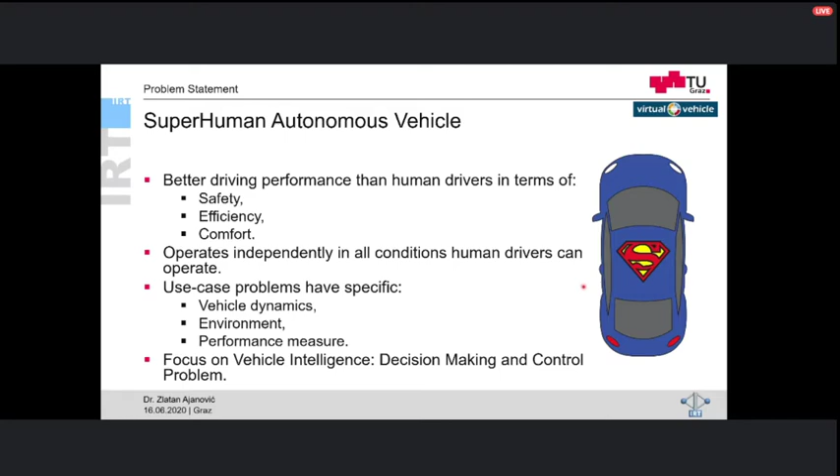So an autonomous vehicle actually can be considered as an intelligent agent. In general in the AI literature we have the term intelligent agent: there is an agent which interacts with the environment, and this can be described formally using a Markov decision process. What we have is an agent operating in some environment, and the agent is some kind of learner or decision maker, depending on which methods we use, learning or pure planning methods. And the environment is everything but the agent, which it interacts with.

So the agent interacts with this environment, and this environment provides the agent some kind of feedback, and the feedback is, as we will see, represented in terms of reward and state. And the state captures all relevant information from the history. So if we have information about the state, we can throw out all the history from before and just keep this state information. And the decision which the agent makes, for example, based on learning or planning, is called action.

So this is how the agent interacts with the environment, and the goal of the intelligent agent is to maximize the cumulative reward in the long run. So if we are in some state st now, we want, in the long run, to maximize the cumulative reward of all of these rewards which we will get in the future steps. This is not so easy a problem, and we will see different methods to achieve it.

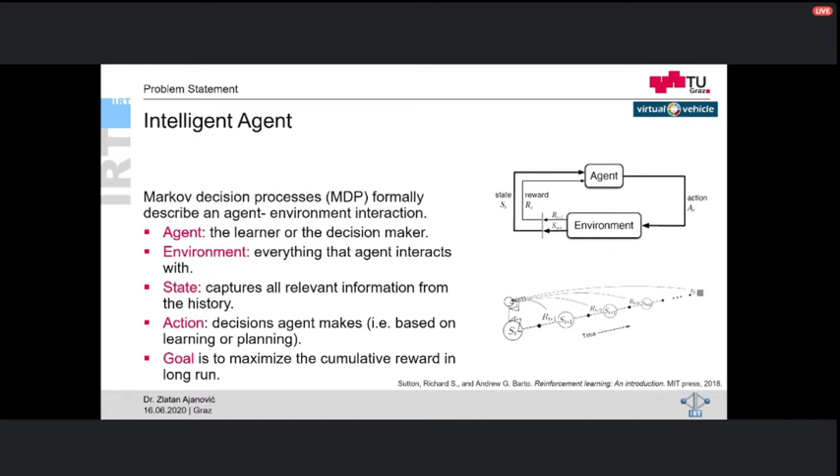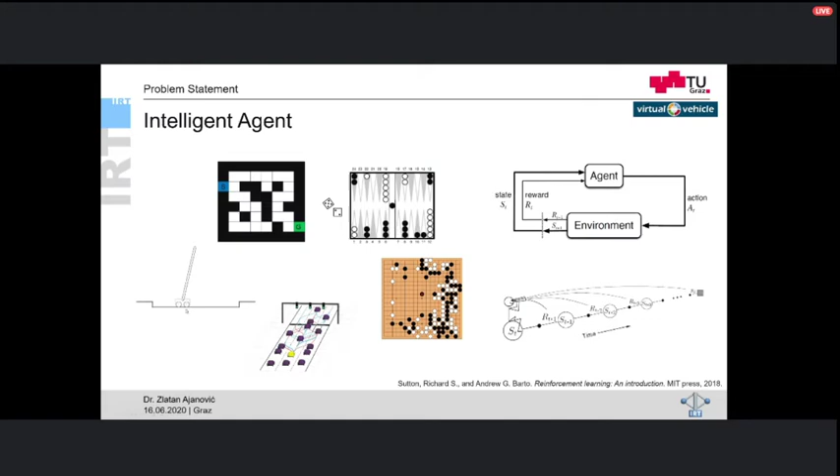There are also different possibilities to describe a system. If the system is, for example, not stochastic, or if it's fully deterministic, we can also formulate it as an optimal control problem. So there are many different examples of the intelligent agent. It can be finding a path in a maze, or playing a backgammon game, or playing Go, or balancing the pole on this moving base, and also automated driving.

So now we come to the planning and learning method. I want to provide you some basic information about planning and learning, just to get everyone familiar with this. There are not so many details, let's say, but I think it's enough to get the full intuition.

So actually, planning and learning are both solving the same problem. We have an intelligent agent, and we want to achieve some kind of intelligent behavior of the agent. In planning, there are two basic ideas. It's based on the value function as a key intermediate step toward improving the policy. So these are state space planning methods, and they need some kind of value function which represents this long-term cumulative reward. And what they do is they compute value functions by updates or backup operations applied to simulated experience.

So we get some simulated experience. We go through the search space, and then we update this value function accordingly to get the final policy. And the goal, as we see on this figure, is that by using a model and applying a planning method, we get some kind of value function or a policy.

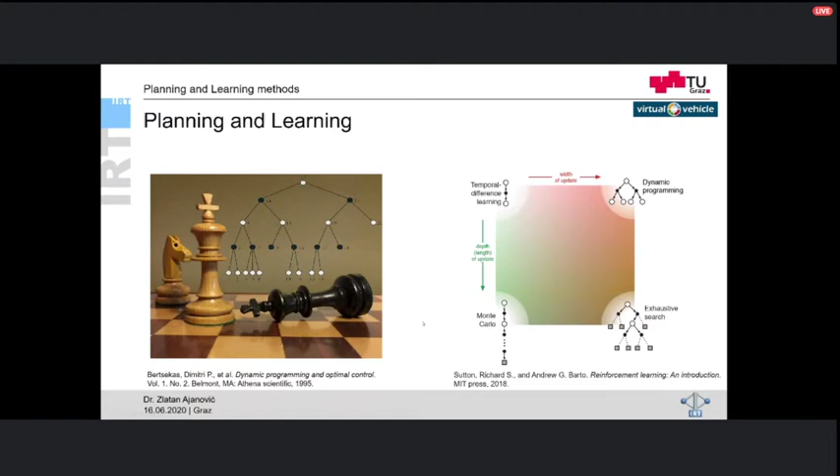The advantage is that for some problems we can use some methods, and for some problems we need additional methods. In many cases, as we look here, these states start repeating themselves. For example, in problems of optimal control, where we want to plan the velocity of a vehicle or something like this, we get repeating states.

So we can have a graph like this. This is an acyclic graph, directed to this side. If we have time on one axis and some other state variable on another axis, what we usually have is one final goal state which we want to achieve, and an initial state which we start from. How we go through this state space is determined by which methods we use.

For example, if we use backward dynamic programming, we would go backward from this state. We look at all the states here, then we go one step back and look at all of these, then we go one step back and look at all of these by reusing the results here, and so on until we come to the initial state, and then we take the optimal action.

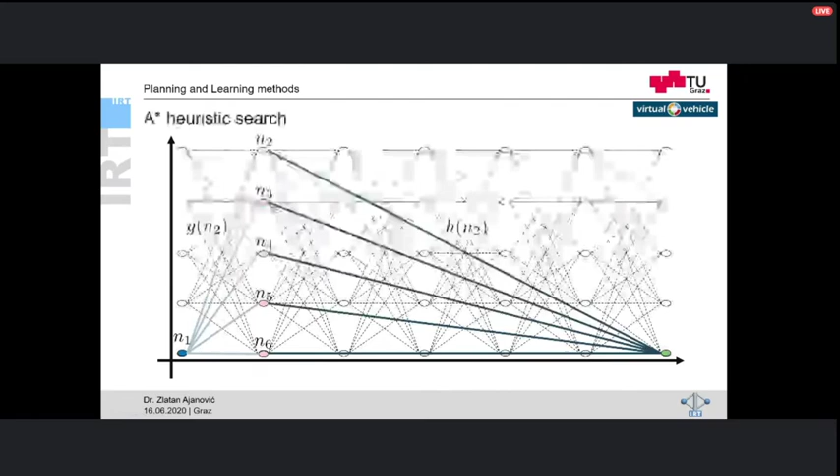Another way is, for example, using A star heuristic search. We use additional information, called a heuristic function, which guides our search to avoid searching the whole search space. Based on the results of the first state, we choose the next one, and we search until we find the solution.

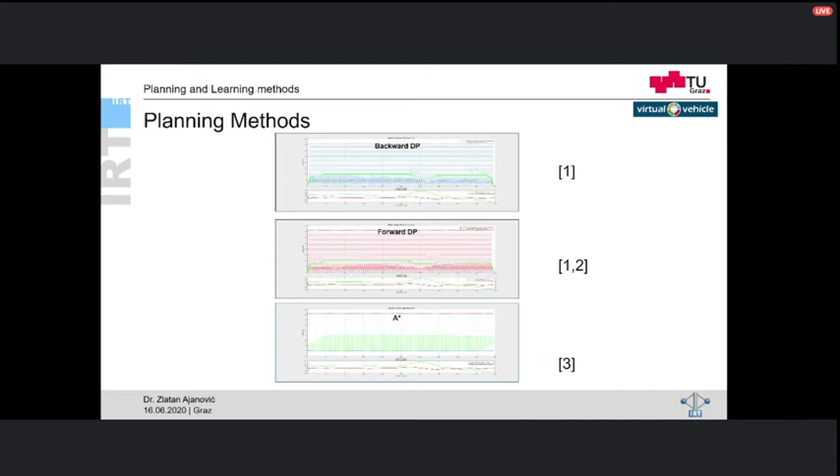So how does it look? You can see on this animation, you can neglect this part here, that in backward dynamic programming we go from the back, and in forward dynamic programming we go from the start. And A star search, I can go again, goes where the more promising regions are, and it doesn't search the whole search space. This is important because we will use these ideas of different search spaces and different methods to get very efficient algorithms.

I also used different learning, planning, and control methods. Control is related to dynamical systems and how to deal with continuous dynamic systems. As we saw previously, we had a discretized state space, but sometimes we also need to consider the continuous state space of the system.

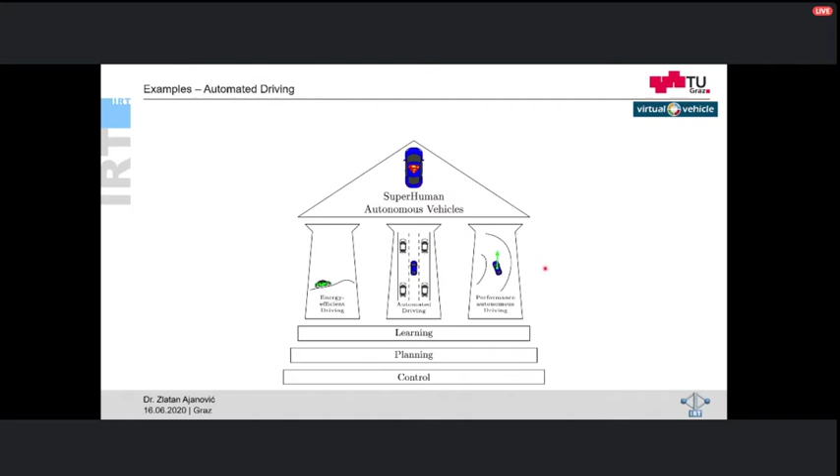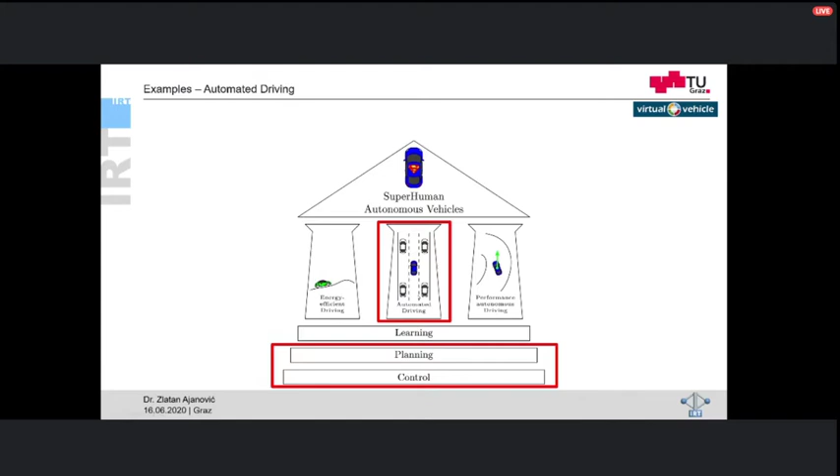So the first example which we will see is automated driving in regular urban traffic based on planning and control. So we have this problem, and we will look at this toy example. So there is an autonomous vehicle which we control, marked in yellow, and there is a purple vehicle in front of it, and there is a traffic light, and these vehicles are approaching the traffic light.

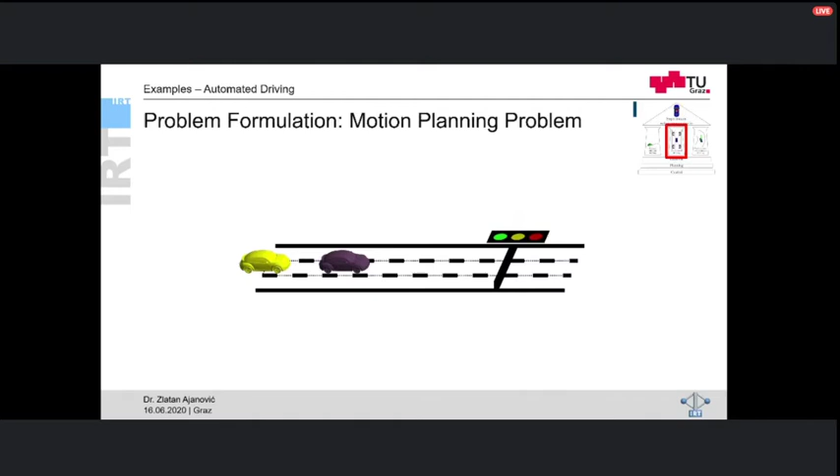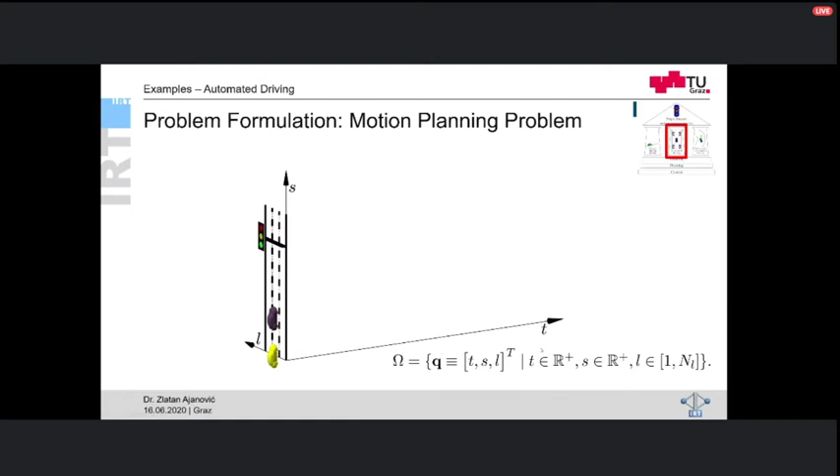To have this dynamic problem as a static one, and to be able to actually plan to find the best solution for this problem, we can augment this state with time. So one axis is S, which is distance along the road. The other one is L, which is lateral motion on the road, and then the third one is time. And then the traffic light becomes some region; it represents an obstacle as a region in this three-dimensional space. So we see here that after some time, the traffic light turns yellow and then turns red.

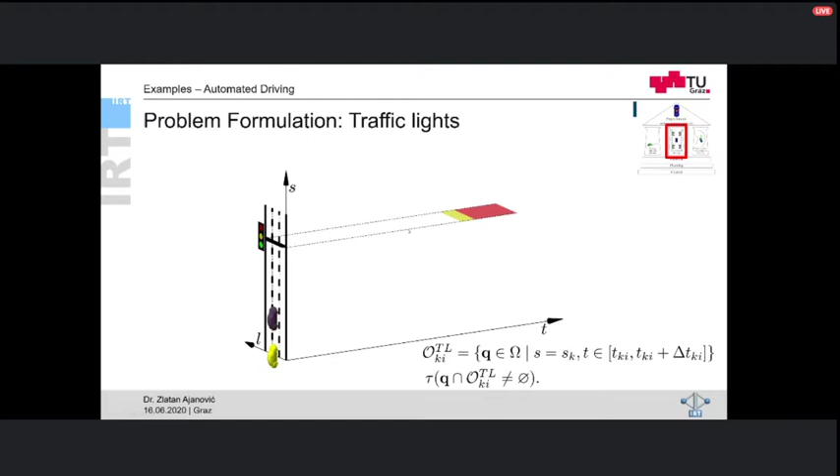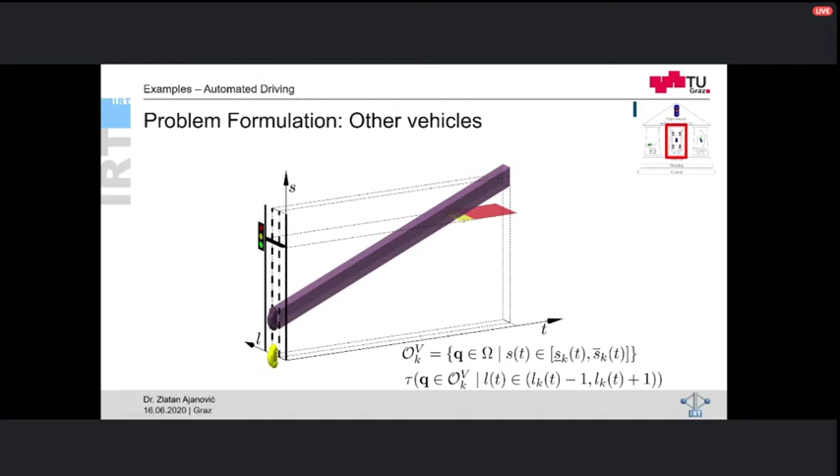Then the other vehicle, which is in front of us, we use some method to predict. In this case, we just predict that it will continue with constant velocity, and we see that this vehicle represents some region which is moving in front of us. So the vehicle occupies this region, and we see here that it passes the traffic light before it turns yellow. And then for the ego vehicle, we need to actually plan the trajectory, as a sequence of these states which doesn't collide with any of these obstacles.

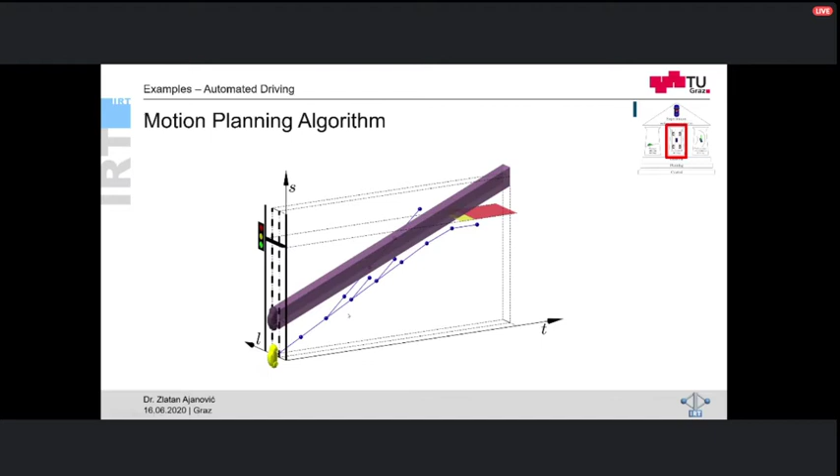So it's more or less the same problem as finding the path in the maze. Exactly the same problem theoretically. It's just the maze is, let's say, higher dimensional, and also we have a continuous space. So we have a continuous search space, and we need to solve it with some other method. So to avoid the continuous space problem, we can generate motion primitives which represent different actions of the vehicle. So we have here longitudinal motion variants. So we can sample different accelerations of a vehicle.

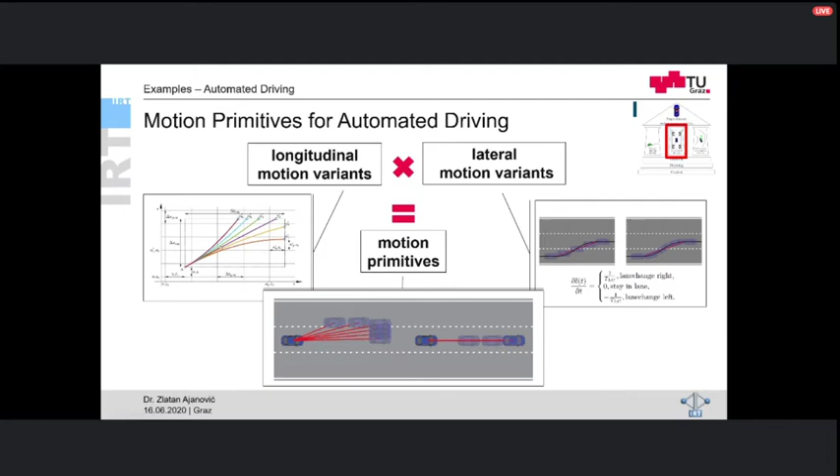And then based on this, we use search-based optimal motion planning. So we developed this algorithm based on heuristic search, motion primitives, and also some kind of heuristics to plan in this complex space very efficiently. So a trajectory of the system is built by concatenating motion primitives. So this ensures that the system is dynamically feasible. That means when we have initial velocity here, we take it as a part of the state and initial condition for future action. So then we have it dynamically feasible.

Then we plan until any of the trajectories reaches the distance or time horizon. So if we look at this figure here, we search until we reach some of the time or distance horizon, and then when we find, let's say, the trajectory which keeps our vehicle collision free for the next 10 seconds or next 200 meters, we are finished with this plan, and then in an MPC approach we take this first action and execute it, or we take the planned trajectory and provide it as a plan for the following.

And we use a hybrid A star for practically searching in continuous space. So the hybrid A star is one variant of A star heuristic search, where we can search in continuous space and keep all of these continuous variables without rounding them to the grid.

And we use relaxation-based heuristics for guiding the search. So we actually use dynamic programming to solve the simpler problem, and then use this solution for the future planning in the search-based optimal motion planning. And if timeout is reached, so if we have some set timeout and we didn't find a solution which reaches the distance or time horizon, we use the longest plan which we have so far.

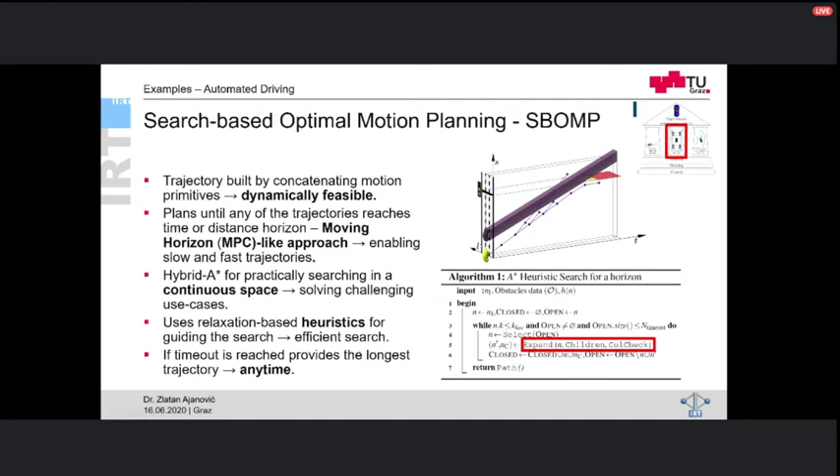So how does this work in reality? We have a little bit more complex example than shown before. The ego vehicle is white in this case. So this is our vehicle which we control, and all of these are different vehicles driving around us. We see that there is a traffic light here, and now we have again this T and S plane.

This is generally three-dimensional space, but here we show actually the SL slice, so only what is happening in the initial state, not the projection, and we have here the ST projection of all of these vehicle states in the future, how we predict they will be. We see the initial state of the ego vehicle, it has some initial velocity, and this traffic light, after 12 or 12 and a half seconds, will turn yellow and then turn red.

And we see that the red vehicle in front of us is this one. If it continues driving at the same velocity, it will be the last one catching the green light, and then the light will turn yellow. So it's quite a complex and challenging scenario, because the ego vehicle has to overtake this vehicle. We see here that the ego vehicle speeds up, goes into this gap, catches the vehicle, and when it catches it, it starts changing the lane.

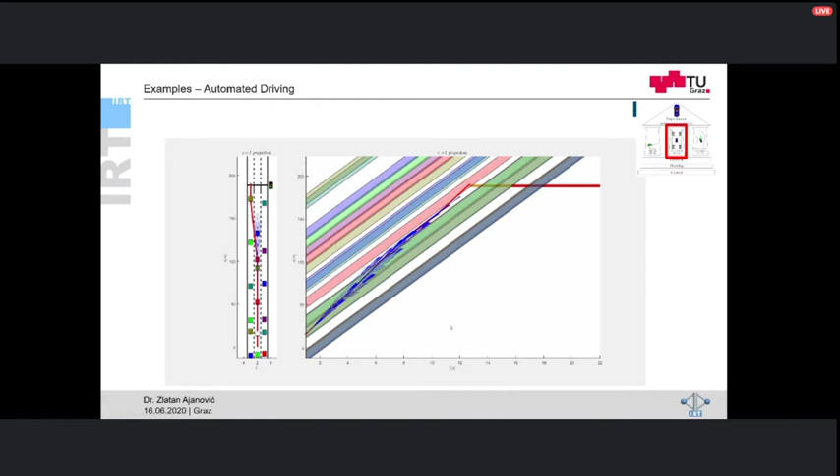In the background, we actually use a heuristic search method, this SBOMP algorithm which we developed, to find this optimal solution. We explore the search space until we find a solution which goes either to the distance or time horizon, then we execute one part, and then again search for the solution until we reach the distance or time horizon. This happens in the background with very high frequency, around 100 milliseconds per step.

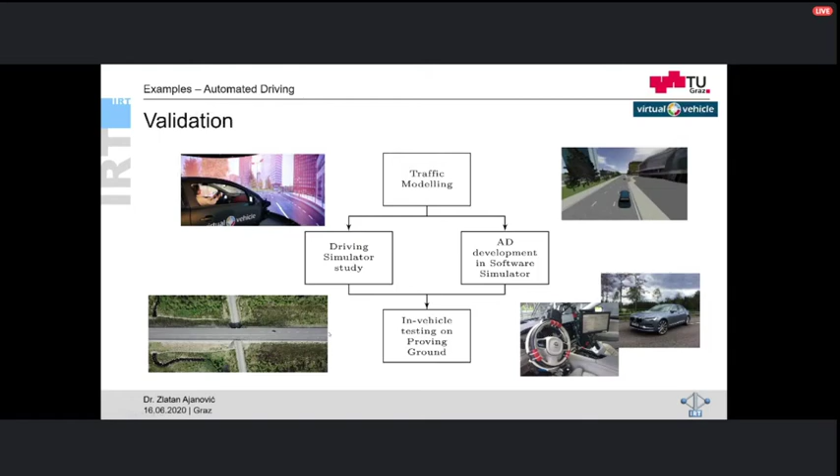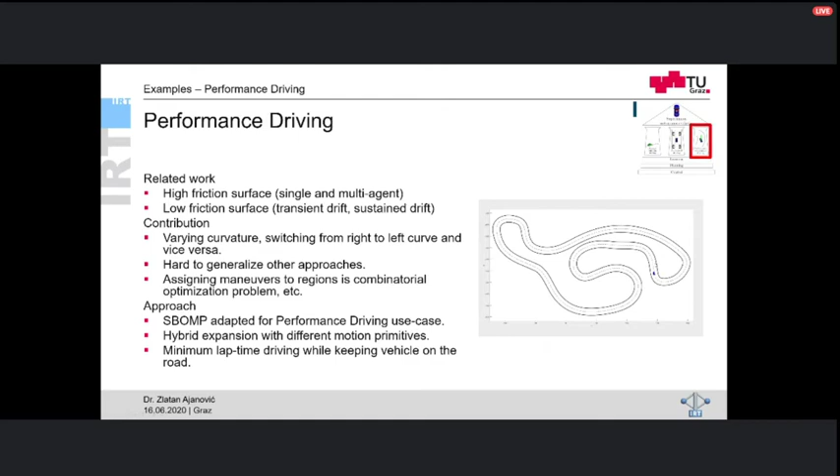We also validated this in the driving simulator and on the proving ground, but I will skip this and go into a different example. The other example is performance autonomous driving, where we use different models to achieve more dynamical driving. We want to push the vehicle to the limits, with some kind of drifting maneuvers.

What we have here is a vehicle represented by a higher dimensional system. The node represents the state of the system. We have x, y position, we have yaw, the orientation of the vehicle, we have the velocity, we have the side slip angle, these are vehicle dynamic states, and we have a yaw rate. So it's already quite high dimensional, we have 6 dimensions, and it's a very complex space to search in.

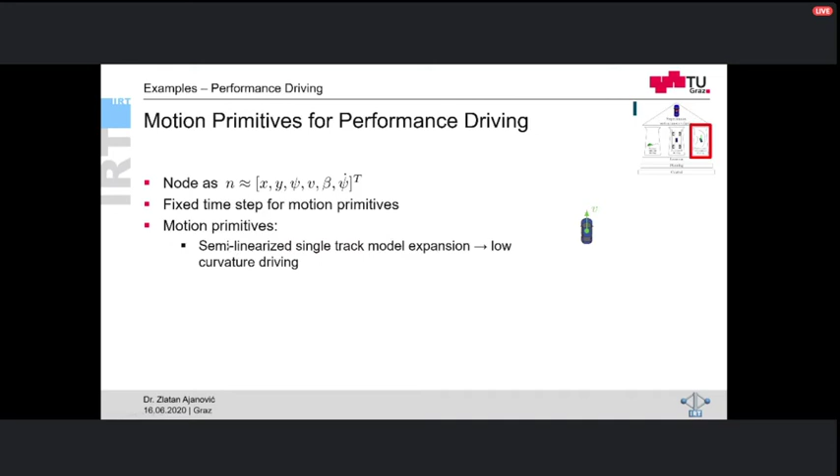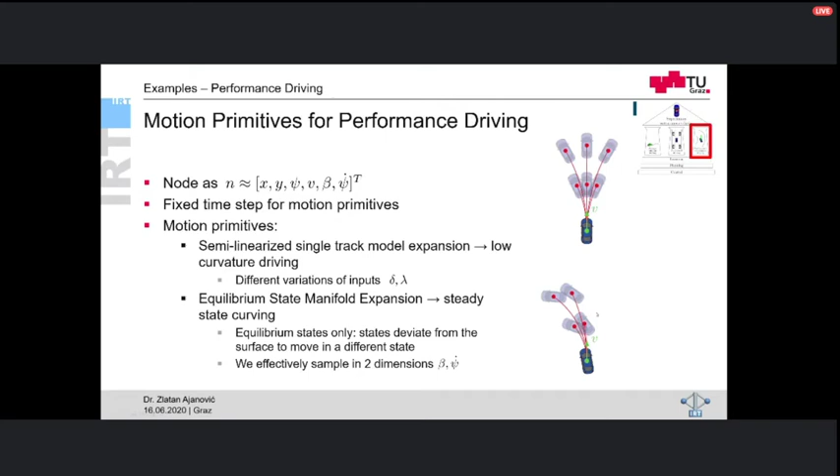So what we did is we simplified this and we use different motion primitives. Some are for a semi-linearized single track model, and we sample that in some regions of the state, and the other ones are for drifting. And by approximating all actions of the system into these smaller sets of actions, we can actually get a

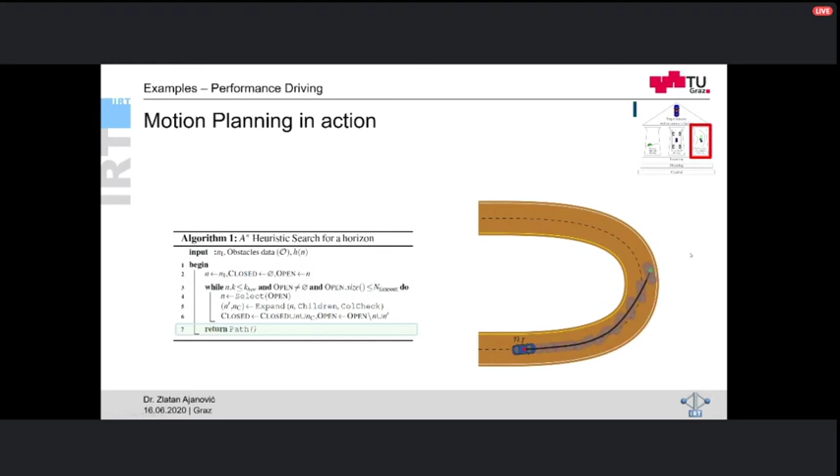quite good result. So same as before, from the initial state we generate different motion primitives, and then again we remove those which are out of the road, so they are colliding, let's say, with the obstacle. Then we select a new node to expand, we expand it, and iteratively, using motion primitives, we get the full trajectory for the system.

And this is how it looks. So we have the full plan of the system for some horizon. You see here the full plan the vehicle plans, but it only takes the initial plan and then replans again in the MPC style. And in the background, for each of these plans, we actually have this tree search, and we use heuristic search to find one feasible solution.

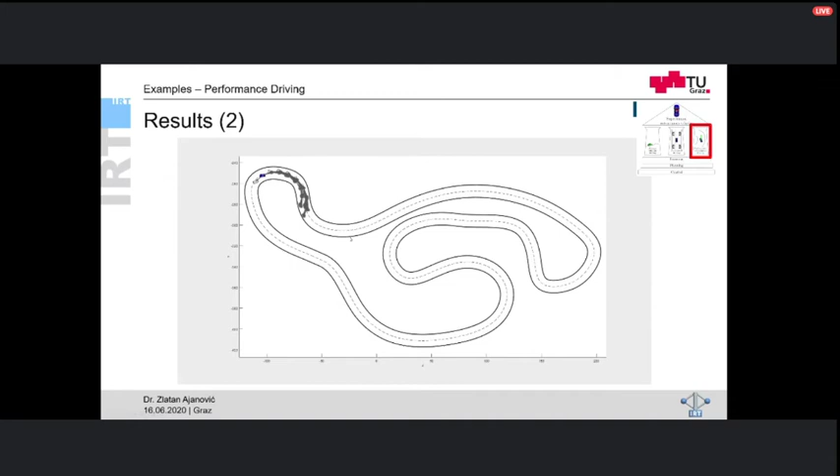So the main problem with planning is actually computational complexity. What happens is that we need to search many states to get the final plan. So it can happen that we have, let's say, 200 branches, and if we have 10 states or even more, it can easily scale, and because of the curse of dimensionality, we can get more states to search than the stars in the universe. So it's quite easy to.

And the other problem is that usually for planning we assume that we have available models. Sometimes we don't have available models, so then we need to go into learning methods. So what we have also done here, with colleagues from AVL with Halil Beglerovic, is that we combine learning and planning. So we can use planning to generate some data to improve future planning.

So the main idea is that we can actually learn a value function and use it as a heuristic function in the search. If we have a value function of a system, which represents the long-term reward we will get, ideally we can use it greedily, so we just go in the direction which maximizes our value function. But the problem is, due to the noise of the value function, we can get not so good

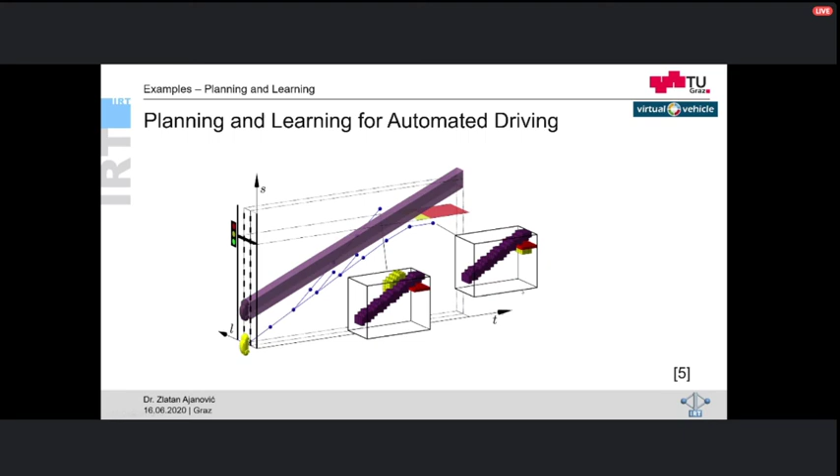So as a conclusion, these are very narrow samples of all that is there in the combination of planning and learning, and I think this is quite a promising field, and much research is now happening in this field. What we presented is a general motion planning framework, search-based optimal motion planning, and it's scalable to different use cases for automated driving. Still, there is a computational performance problem.

In this example, it's working at the limits, but if we want to add more features, extending vehicle dynamics and having more driving features, then it gets slow. That's why we need some kind of approximate methods. And we also presented work on a novel approach for model exploration for value function learning, which is one of the approaches which could be used.